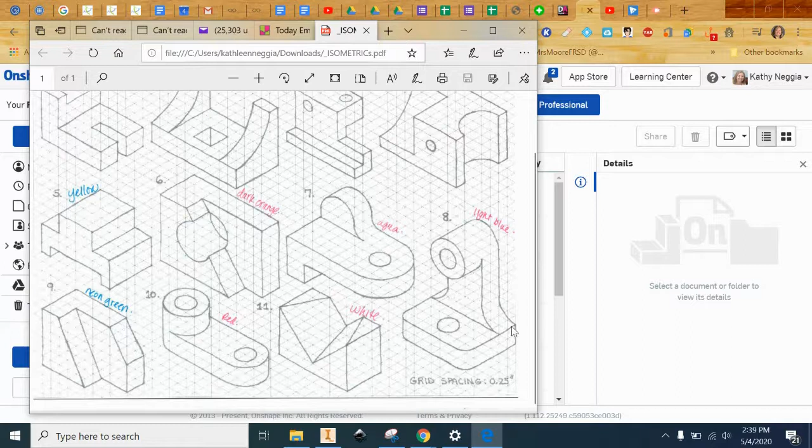I'm going to start this by looking at the top face. And from the top face, I'm going to create a rectangle that I'm then going to fillet corners on. So the size of the rectangle that I'm going to create, it has a width of 2 and it has a depth of 1.5. When I extrude it, I'm going to extrude it 1/2 inch. So let's create ISO 8.

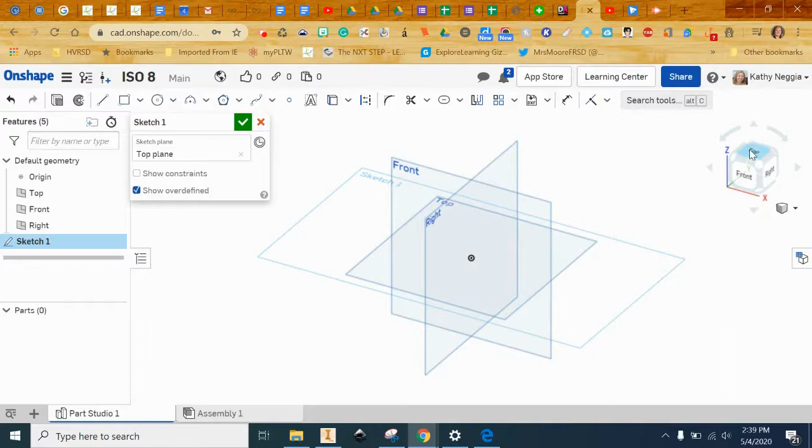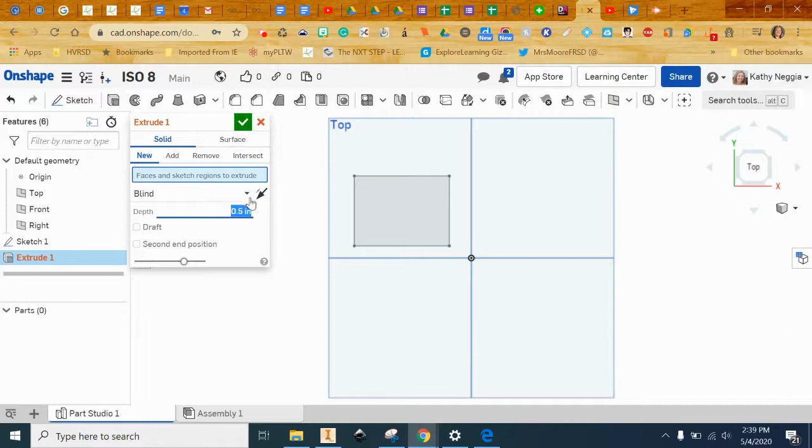Okay, we'll begin by creating a sketch on the top face. And we're going to create that rectangle that is 2 wide and 1.5 deep. Okay, once we have that created, we're going to extrude that up 1/2 inch. And that will give us something that looks like this. Okay, so let's zoom in.

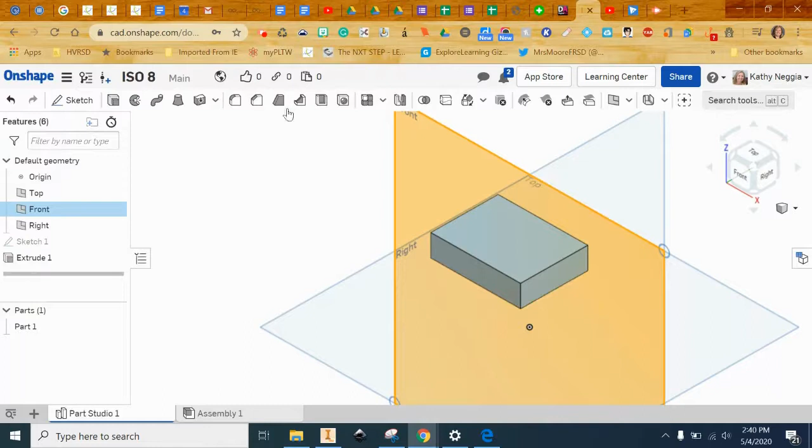And I'm going to first fillet these corners. Looking at the diagram, if I put a point right here, that looks like a circle. So the fillet is going to be 1/4 inch. So again, we're going to go into the fillet tool. Let's choose right here. We're going to make it 1/4 inch. We're going to make this one 1/4 inch as well.

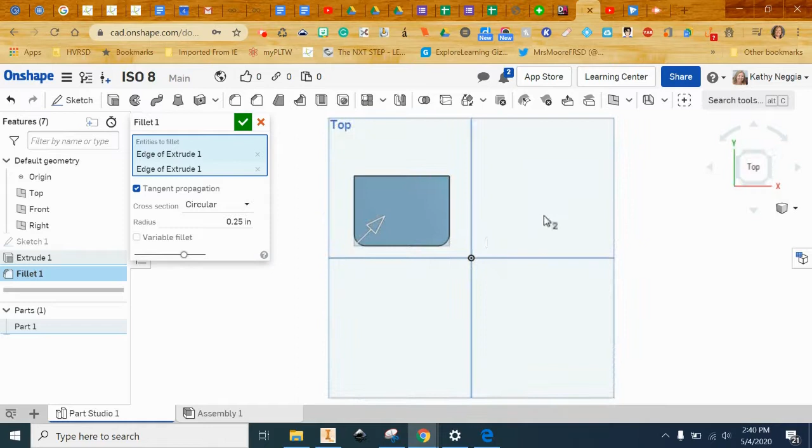Okay. The next thing we're going to do is we're going to locate a point that we can drill a hole through on. So let's look at it from this direction. And we're going to create a sketch. Zooming in, we're going to create on this face, looking at it from the top, we're going to create a point. We'll just put the point here because we can use dimensioning to locate where it needs to be.

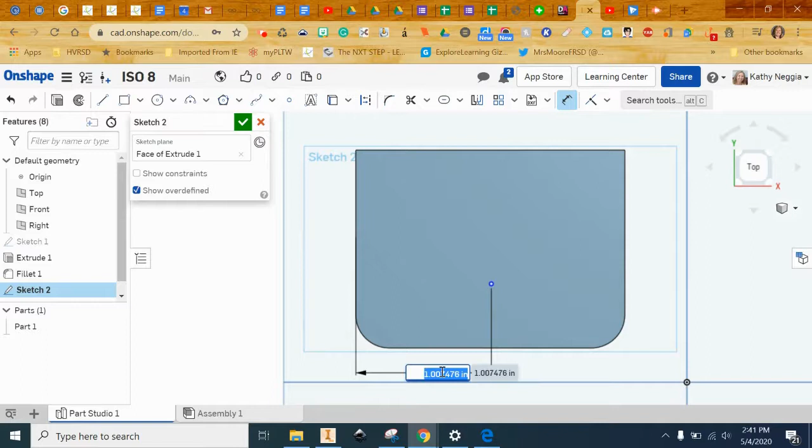We know it needs to be the midpoint of this line. So this width is 2. If we divide it by 2, or we could type in a 1, we'll get that dimension. We also know that it is 1/2 inch from the edge this direction. Okay, we'll save that. We'll go to the hole tool. We'll say we want to create a hole right here, and we want our hole to have 1/2 inch diameter.

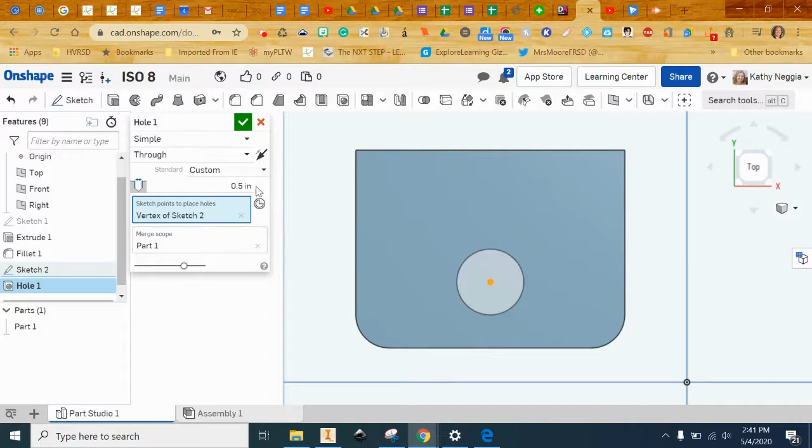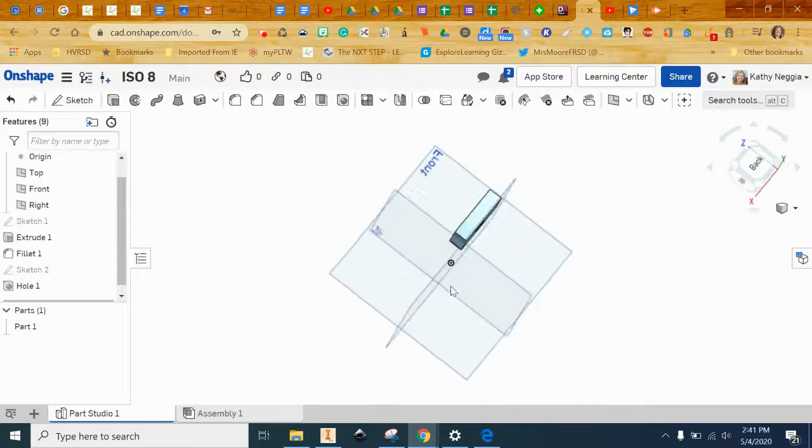Okay, so we have this bottom half created. The next thing we're going to do is create a rectangle. We're going to do it from the back face, and the height of that rectangle is going to be 1 3/4 inches, and it's going to be a width of 1 inch. 1, 2, 3, 4. Yep. Okay, so I'm going to rotate this way. We're creating a sketch on the back.

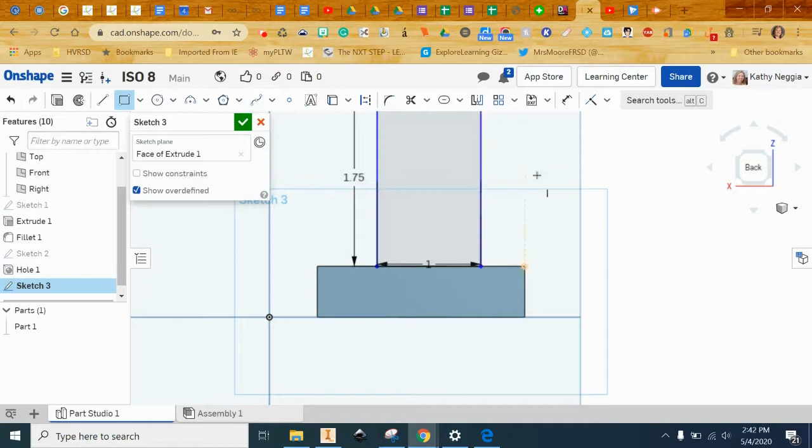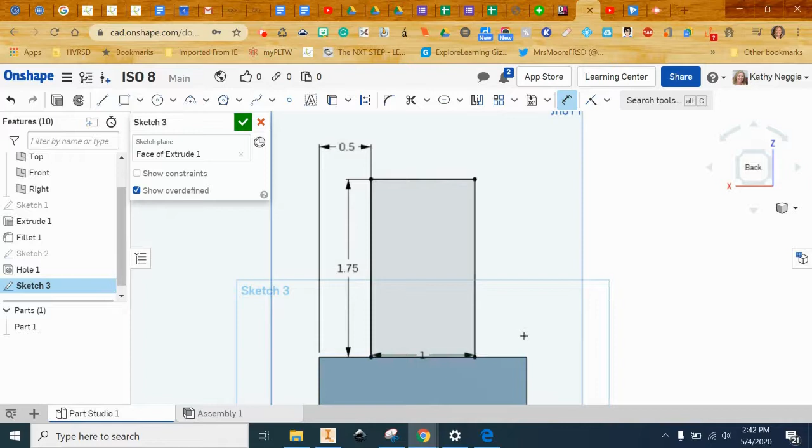Okay, zooming in, I'm going to create a rectangle. I'm going to make sure it's touching that line. I'm going to bring it up, and we said it's going to be 1 inch wide and 1 3/4 inches tall. Okay, now we just have to make sure that it's in the right location. So we know from here to here should be 1/2 inch. We don't have to dimension this because we know 1 plus 1/2 inch is 1.5, and our total width is 2. Okay, and we're going to click on OK.

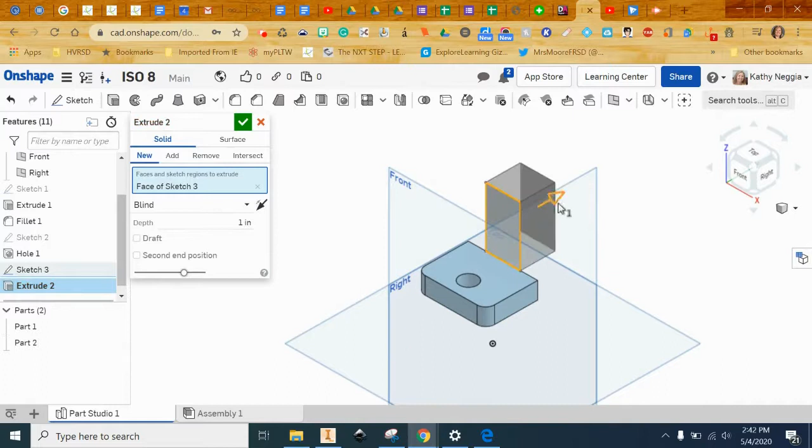Let's go back to our isometric view because we're going to extrude it forward 1/2 inch. So let's choose this. This is the face. We're going to bring it the forward direction, and then we can type in over here 1/2 inch. Okay, and we've just created the rectangle that we're going to fillet.

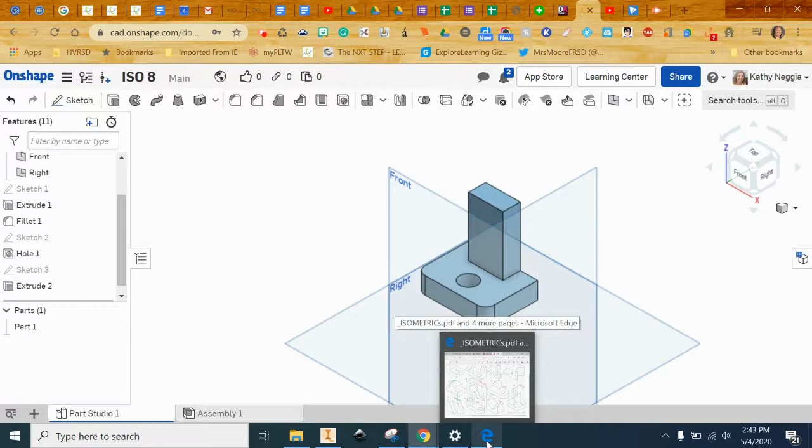Okay, so looking at the top, well, let's look here. Looking here, we know that the diameter of that circle is 1. So our fillets are each going to be here 1/2 inch. So I'm going to fillet here 1/2 inch. And I'm going to do the same fillet here. And that'll give me my nice round curve.

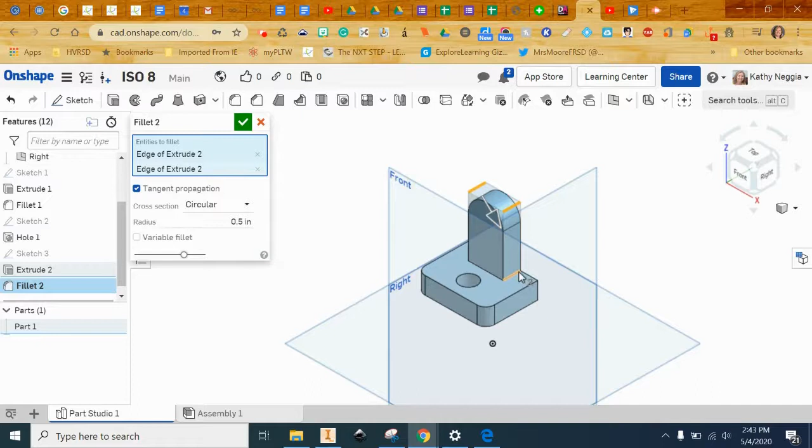Okay, I'm also going to need to fillet here. And these fillets as well are a 1/2 inch. So I can just click since I have that selection made. Okay, the last thing I'm going to do for this piece is I'm going to next add a circle and extrude it in this direction.

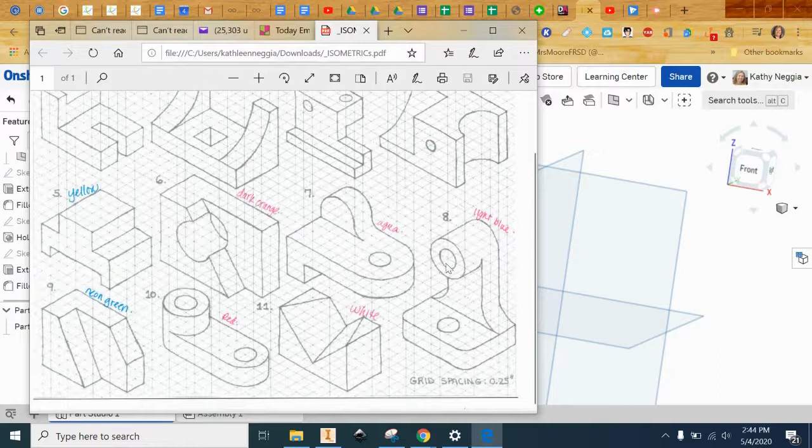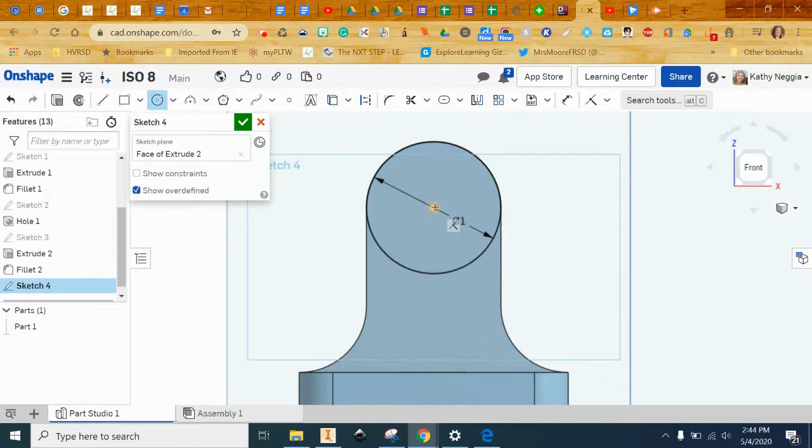Okay, so my circle will be sketched on this face. And let's look at it from the front. I want to create a circle that starts at the center and is 1 inch diameter. Okay, if it lines up, perfect. If it doesn't, then I would dimension from here to the bottom, and that dimension would be 1.75. So I don't need to do that because my circle ended up being in the correct location.

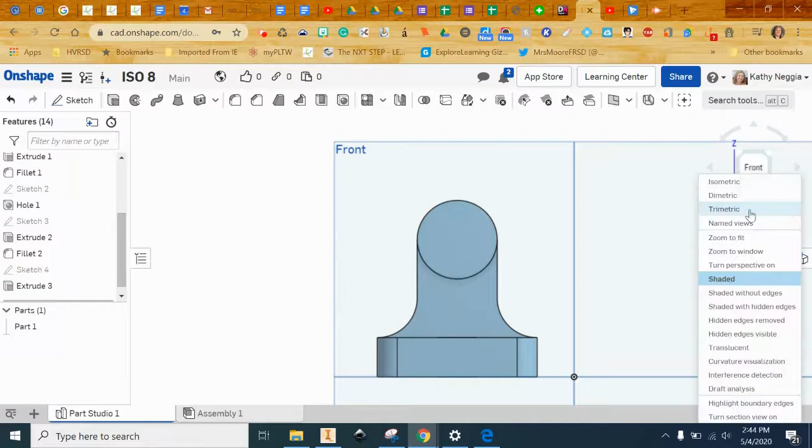Okay, let's extrude out just that circle, and we'll extrude it out a 1/2 inch. And that leaves us with this as our figure. The last thing we're going to do is punch a hole through it in the center, and the hole will have a 1/2 inch diameter. So let's sketch the front. Let's look at it from the front, and let's locate the center.

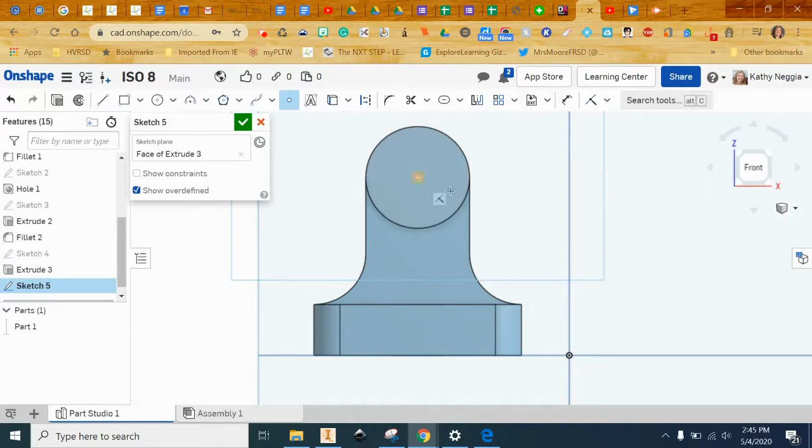Okay, and I had the center located. So the last step, all I need to do is create a hole on here, and my diameter should be a 1/2 inch. When I rotate around, you'll see that I have ISO 8.